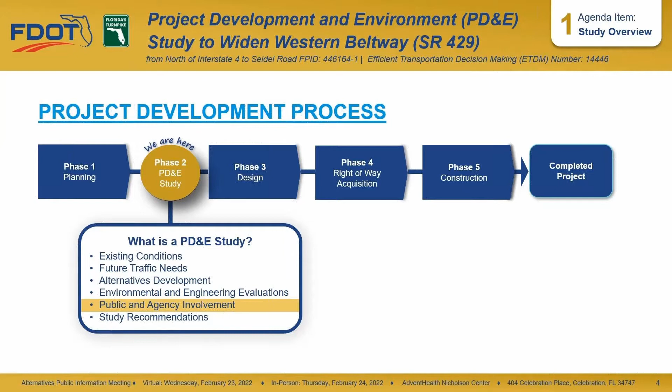An important component of the PD&E process is public and agency involvement. All findings and recommendations are documented at the end of the study. If a build alternative is selected, then the process moves forward into the design phase. If additional land is required for the project, right-of-way is acquired after the design phase, followed by the project's construction phase.

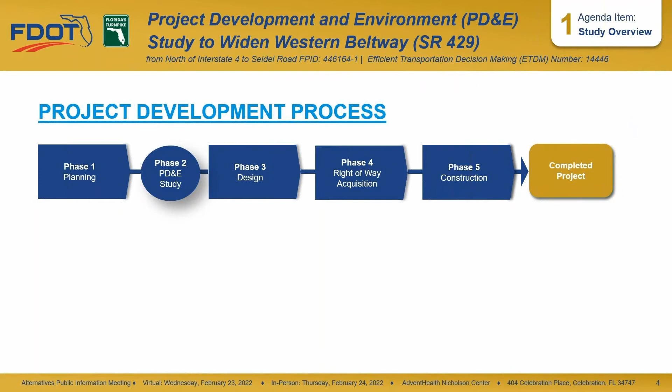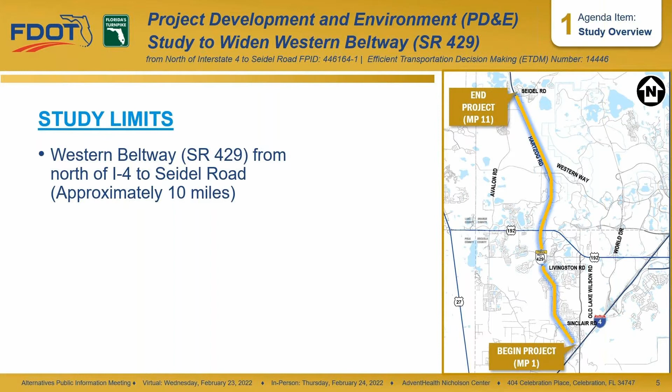The study limits extend from north of Interstate 4, milepost 1, to Seidel Road, milepost 11. The project is located within Osceola and Orange counties. The study scope includes evaluation of alternatives for the widening of Western Beltway from 4 lanes to 8 lanes, and evaluation of improvements to existing interchanges at Sinclair Road, US 192, Western Way, and Seidel Road. The study scope also includes evaluation of a potential new interchange, proposed at Livingston Road.

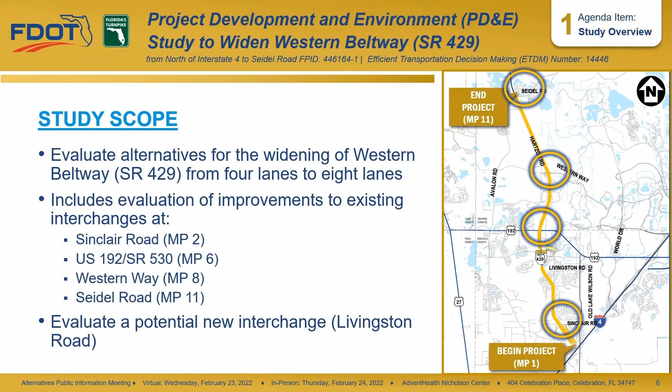Project needs arise from issues and concerns that may frequently slow down traffic, cause delays, or lead to accidents. The need to widen the Western Beltway is based on enhancing safety, accommodating travel demand through the year 2050, improving travel times and reliability, and enhancing economic viability, emergency responsiveness, and evacuation times.

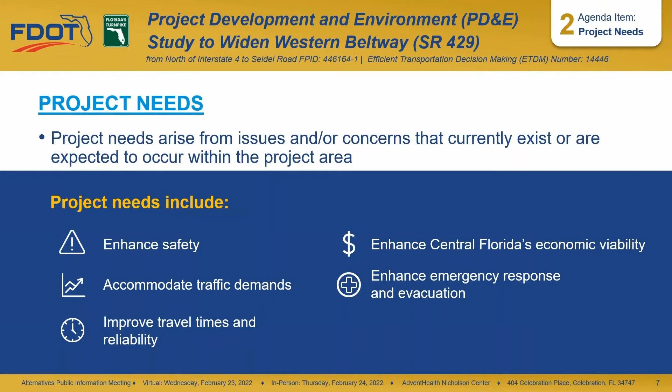Improvements to Western Beltway are needed to enhance safety. Between 2014 and 2018, there were 161 crashes within the study limits between the I-4 ramps and Seidel Road interchanges. The estimated economic crash cost is about $33 million over the 5 years. Congestion is a major contributing factor to crashes. If nothing is done, congestion will continue to rise, leading to an increase in crashes.

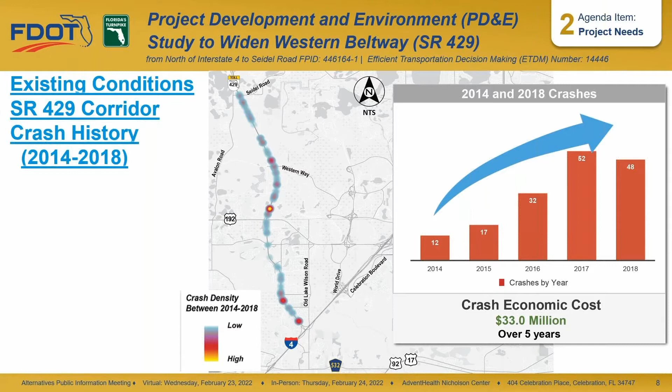The average historical growth rate on State Road 429 between opening and closing years is 10%. This can be attributed to the high increase in population and employment opportunities in the area, as well as recreational activities. During the evening commute, traffic backs up on State Road 429 in the southbound direction towards I-4, and long queues have been observed at the State Road 429 southbound off-ramp to US 192.

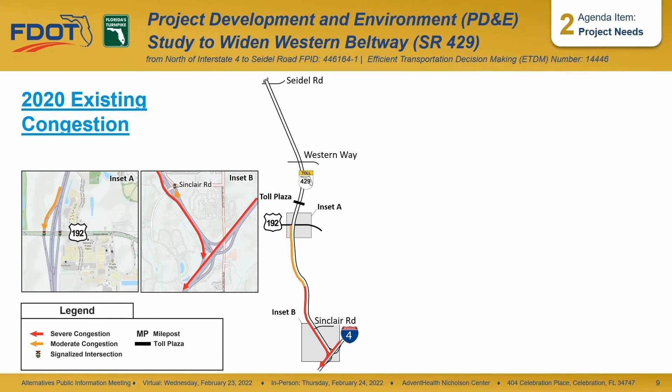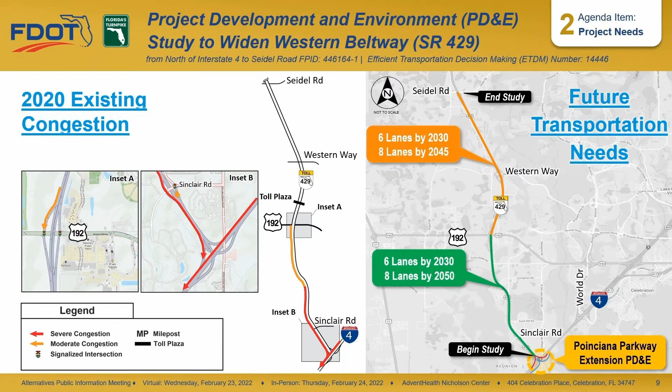In order to accommodate future travel demand, 6 lanes are needed by 2030 and 8 lanes will be needed by 2045 for the segment between US 192 and Seidel Road, and between I-4 and US 192 by 2050.

The improvements considered as part of this study include both improvements to the main line and to the interchanges within the project limits, and also a planned connection to the Poinciana Parkway extension planned to the south as part of a separate study.

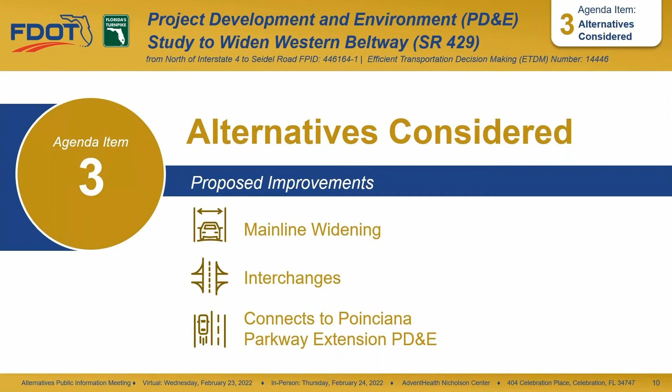In addition to widening the main line, proposed interchange improvements from south to north within the project limits include operational improvements at Sinclair Road, a new interchange at Livingston Road, operational improvements at US 192 and Western Way, and 2 options for interchange improvements at Seidel Road.

The no-build alternative will remain viable throughout the study. We will cover all of these proposed improvements in additional detail.

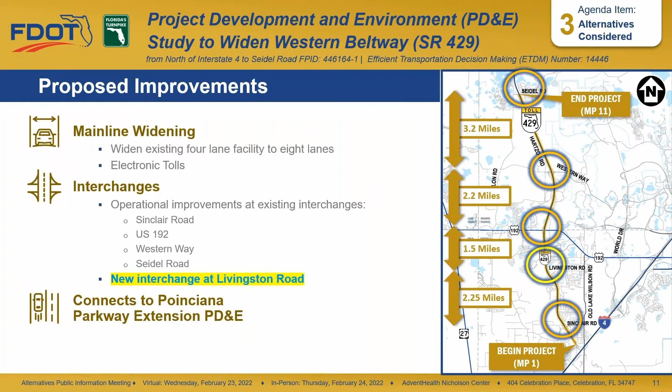Western Beltway will be widened from 4 lanes to 8 lanes throughout the project limits. This graphic shows the existing 4-lane typical section with a 64-foot median. The proposed mainline improvement widens the roadway to both sides. The proposed ultimate 8-lane typical section after widening to both sides includes 4 travel lanes in each direction.

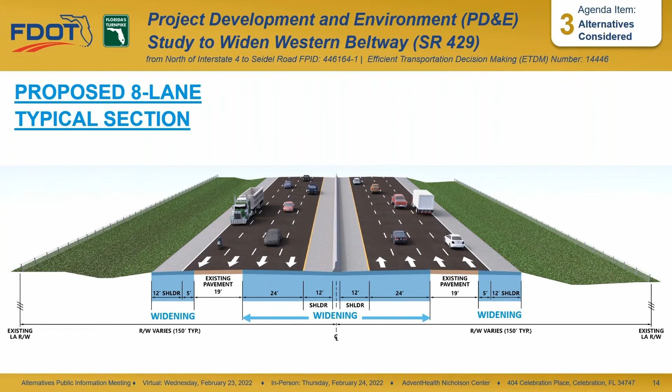Now, we will cover the interchange improvements from south to north, starting with the existing Sinclair Road interchange 1 mile north of I-4.

This presentation shows aerial views of the conceptual design of the proposed improvements with north oriented to the right as shown. The legend shows the difference between any existing and proposed signals shown on the aerial view.

This graphic shows where the project begins and the first interchange at Sinclair Road. The Poinciana Parkway Extension PD&E Study includes improvements to the I-4 interchange and the Sinclair Road interchange.

If Poinciana is constructed, Western Beltway widening would interface with that project north of Sand Hill Road. However, if the Poinciana Parkway Extension project is not constructed, the Western Beltway widening would start further south at the I-4 ramps. The existing Sinclair Road Diamond interchange and the existing signal at the northbound off-ramp would remain.

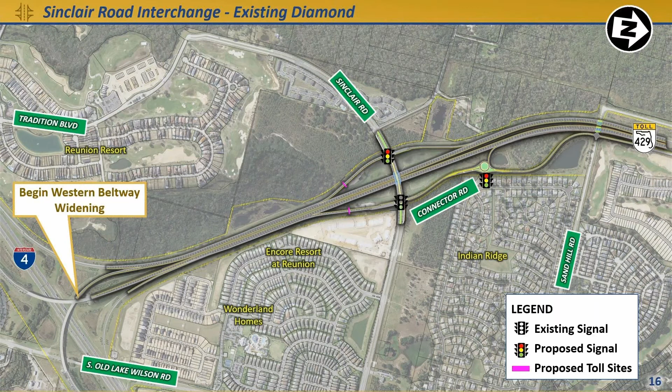Traffic signals would be added for the southbound off-ramp and the southbound on-ramp, as well as turn lanes at all the ramps. These improvements would allow the interchange to operate at a higher level of service in the future as traffic increases. There are 2 options for the Connector Road intersection with a northbound on-ramp.

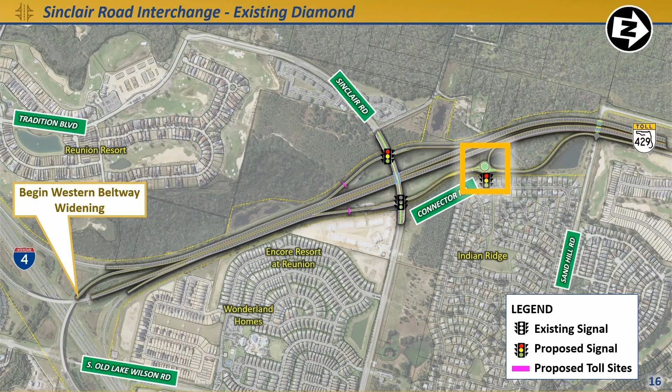We will take a closer look at these options. The first option is the signalization option, which adds a signal at the ramp terminal's intersection with Connector Road, as well as a turn lane in each direction.

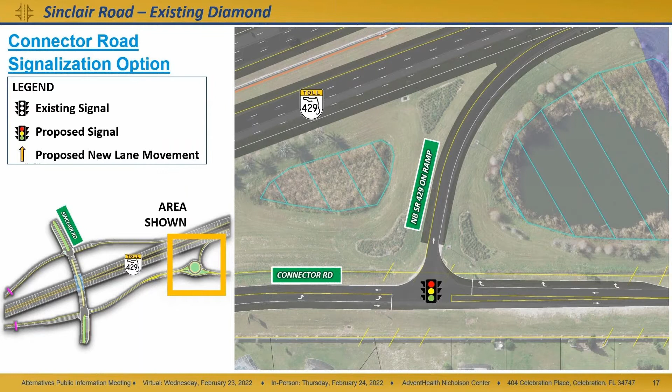The second option would be the addition of a roundabout at the same intersection instead of a traffic signal to control all turning and through movements. The roundabout option shown offers the same movements as the signalization option.

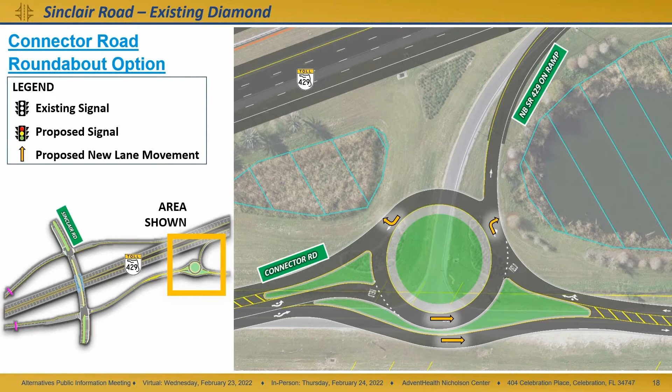Moving to the intersection of the ramp terminals and Connector Road at Sinclair Road, the existing signal would remain, but turn lanes would be added at 3 of the 4 intersection approaches.

Moving west of State Road 429, a new signal would be added at the ramp terminal intersection with Sinclair Road, as well as a right turn lane on Sinclair Road and a left turn lane at the southbound ramp terminal.

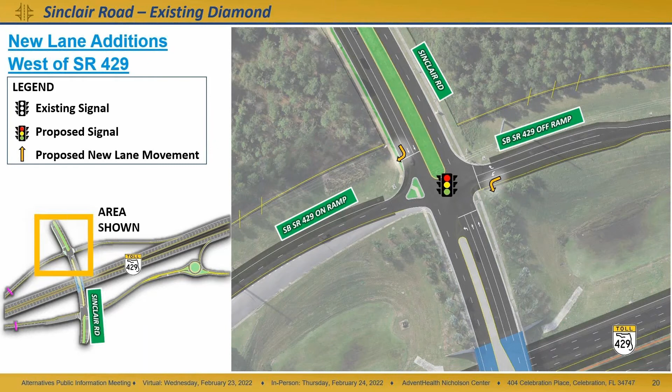The table shown is an evaluation matrix that compares the Sinclair Road interchange alternatives. Both Sinclair Road options have traffic and safety benefits that offer significant improvement over the no-build option. The roundabout option offers the most benefits at a higher cost as compared to the signalization option.

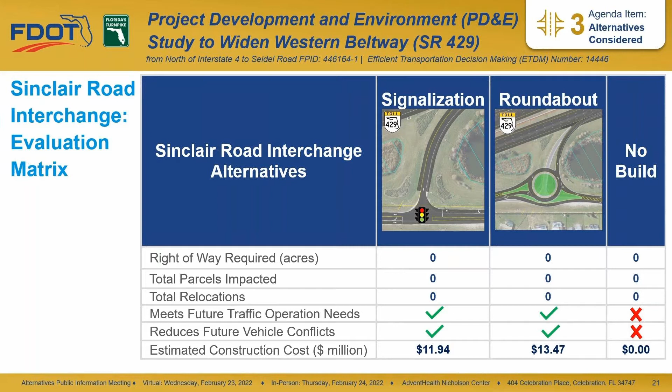The next interchange would be a new interchange located 2¼ miles north at an extension of Livingston Road. This new interchange will relieve US 192 and provide additional mobility in the study area.

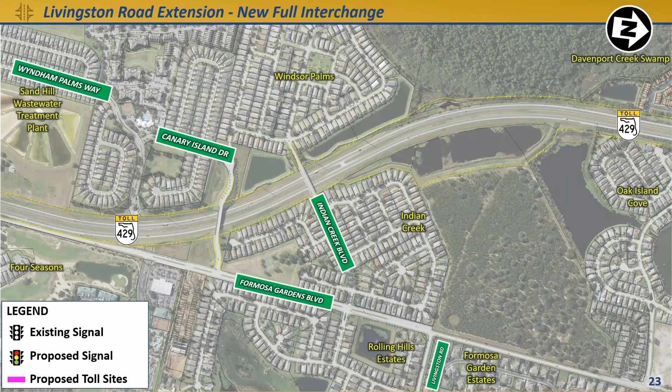The new Livingston Road interchange would offer full access between State Road 429 from an extension of Livingston Road as shown. The new interchange would provide for all movements with loops to the south side as shown here. The ramps to and from the south would be tolled with the exact location to be determined.

This improvement would include widening Formosa Gardens Boulevard for about 1/2 mile to eliminate the short section of 2-lane roadway and match the existing 4-lane condition south and north of Livingston Road. The blue highlighted areas show the location of potential right-of-way impacts where additional land would be required to accommodate the improvements.

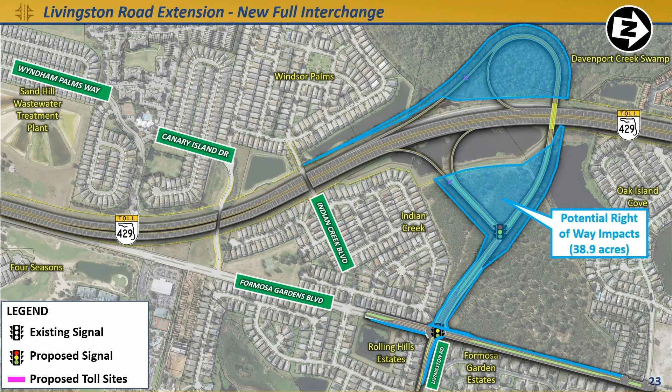We will take a closer look at the beginning of the proposed Livingston Road extension first. The extension of Livingston Road past Formosa Gardens Boulevard includes improvements to the intersection. These improvements include a new signal as well as additional turn and through lanes at every intersection approach.

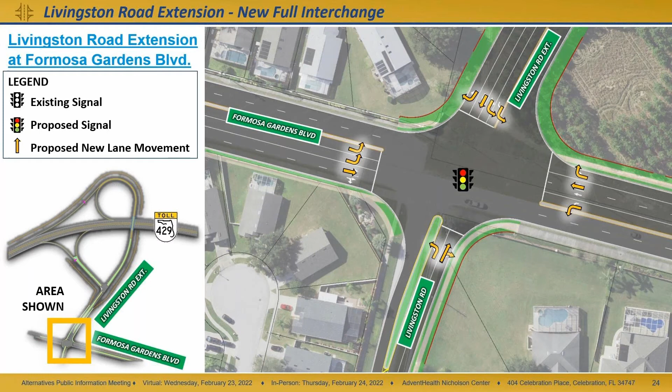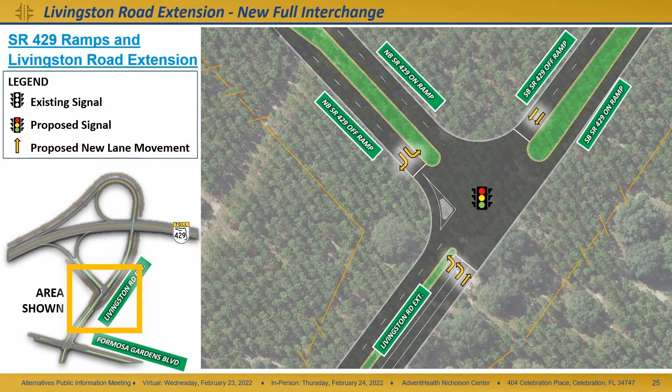The new T intersection at the extension of Livingston Road and the State Road 429 ramp terminals would be signalized and include new movements at all approaches to grant access to State Road 429 northbound and southbound. Modifications to the existing interchange at US 192 are also under consideration.

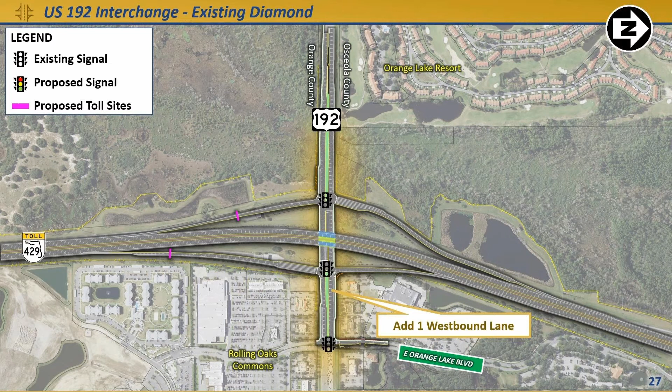Modifications to the existing US 192 interchange include minor interchange improvements at the off-ramps, the addition of one eastbound lane on US 192 from west of the southbound ramp, and one westbound lane from East Orange Lake Boulevard to west of the southbound ramp terminal intersection. These improvements are generally within the existing right-of-way, but may require small amounts of right-of-way to be acquired. We will take a closer look at the intersection improvements associated with the interchange, starting at East Orange Lake Boulevard.

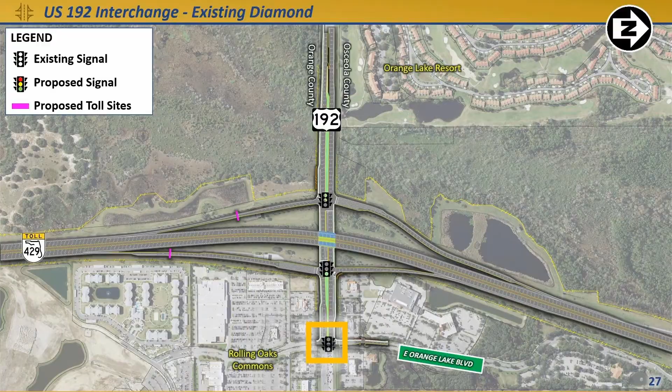On East Orange Lake Boulevard, a new left turn lane would be added at US 192 at the existing signalized intersection, and a new through lane begins on US 192.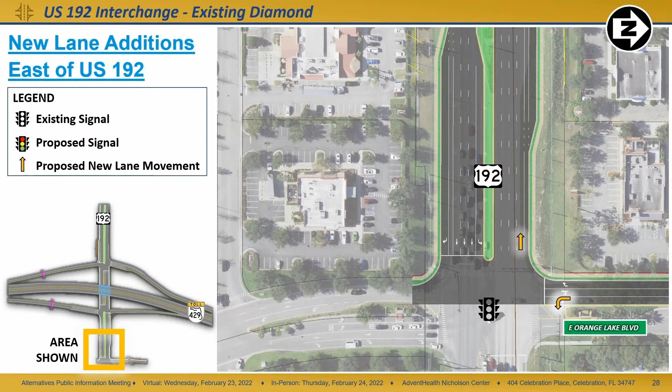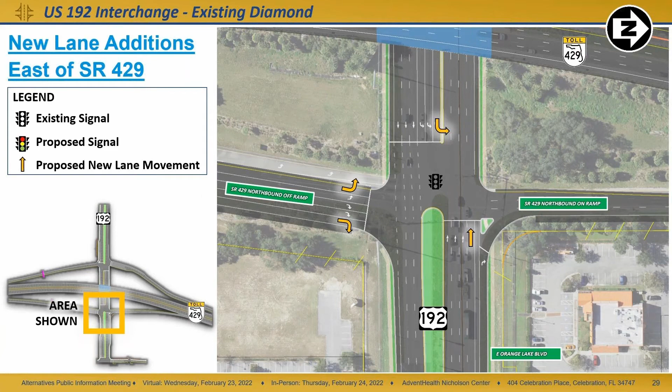Moving along US 192, closer to State Road 429, an additional through lane would be added onto US 192 westbound. In addition, turn lanes would be added on US 192 and at the State Road 429 ramp terminal. West of State Road 429, an additional through lane would be added in each direction on US 192, along with additional turn lanes at the State Road 429 ramp terminal.

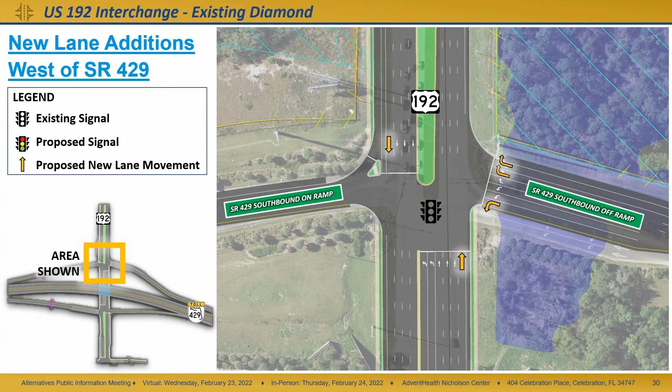Located 2.2 miles north, Western Way is the next interchange with modifications proposed. The proposed Western Way interchange is shown here. The main improvement at Western Way is the addition of a second lane to the southbound loop ramp as shown. Other improvements include signals at the ramp terminals and additional turn lanes at both intersections. The improvements shown are generally within existing right-of-way, but may require a small amount of right-of-way to be acquired. We will take a closer look at the intersection improvements on Western Way starting at the ramp terminals east of State Road 429.

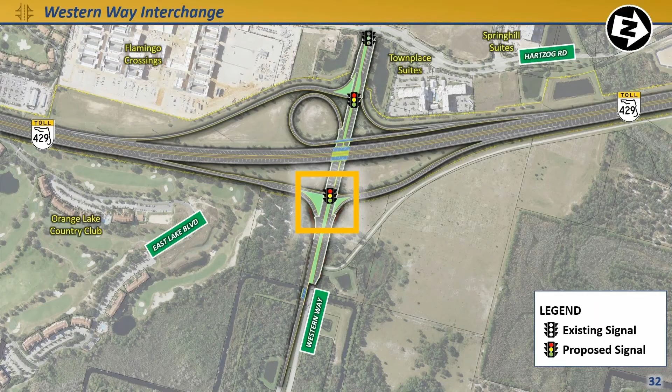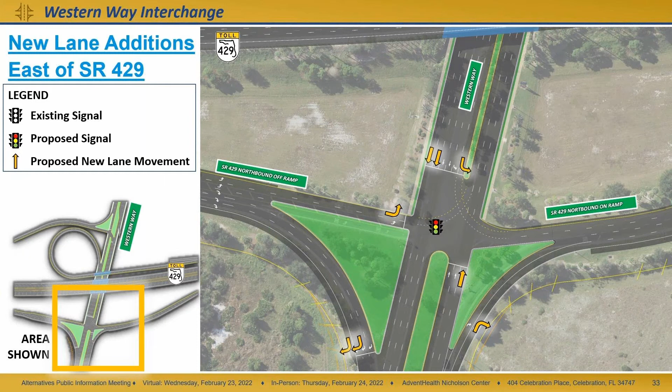Intersection improvements include a new signal as well as additional through lanes in each direction on Western Way. Additional turn lanes would be added at each intersection approach as shown. Moving west of State Road 429, a signal would be added at the ramp terminal as well as an additional left turn lane accessing the State Road 429 southbound on-ramp.

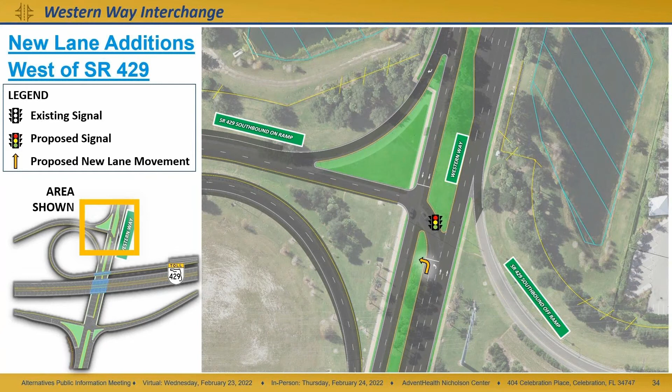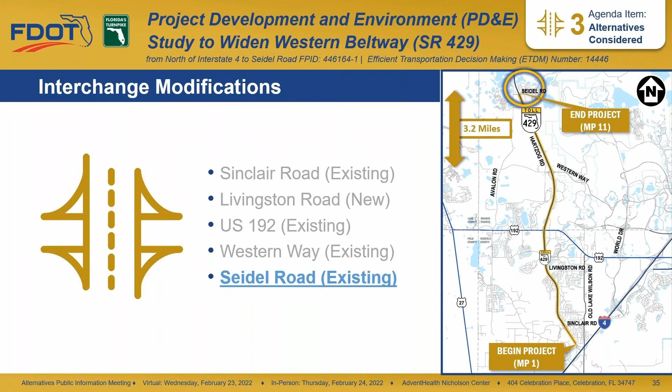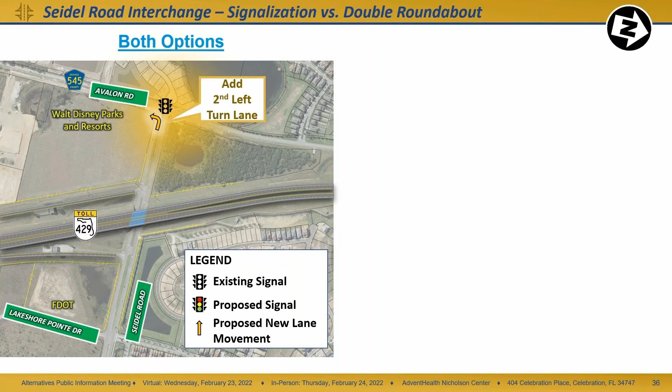The Seidel Road interchange, located 3.2 miles north of Western Way, is an existing interchange with proposed modifications. Two options for Seidel Road are under consideration. Both Seidel Road options would include widening the existing State Road 429 bridges over Seidel Road and a second left turn lane added approaching Avalon Road. The first option at Seidel Road is the signalization option, which includes the addition of signals at both ramps to control traffic movements. No additional right-of-way is required for the signalization option.

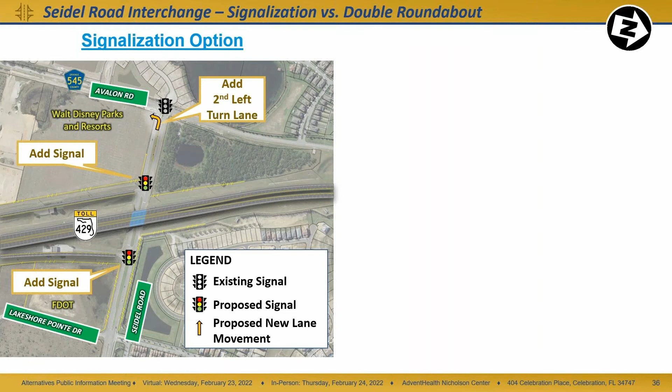The second alternative is the double roundabout option shown on the right, which adds a double roundabout through the interchange area instead of the two traffic signals proposed by the signalization option. For both alternatives, State Road 429 would transition to the existing configuration north of Seidel Road. The double roundabout option requires a total of 0.6 acres of additional right-of-way from 5 parcels.

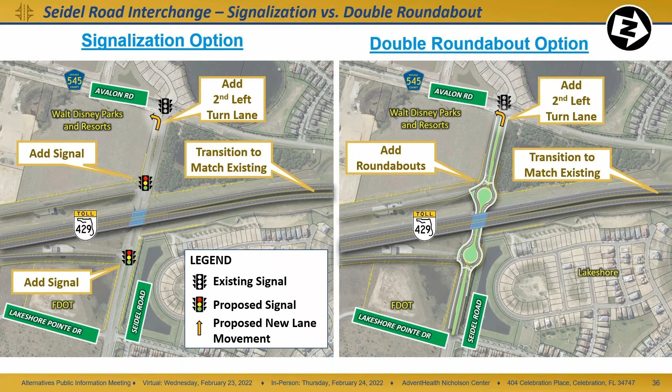The table shown is an evaluation matrix that compares the Seidel Road interchange alternatives. Both Seidel Road options have traffic and safety benefits that offer significant improvements over the no-build option. The signalization option offers these benefits at a slightly lower cost and with less impacts as compared to the double roundabout option.

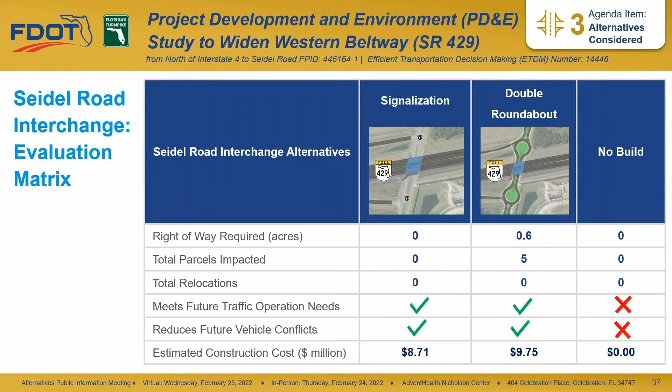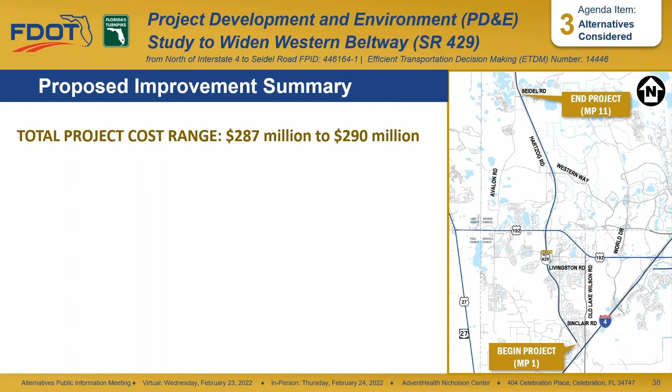The cost of the proposed improvements ranges from $287 million if the signalization options are selected at Sinclair Road and Seidel Road to $290 million if the roundabout options are selected at those locations. These costs include widening the State Road 429 main line within the project limits, the operational improvements described in this presentation at the interchanges shown, and the new interchange at the proposed Livingston Road extension.

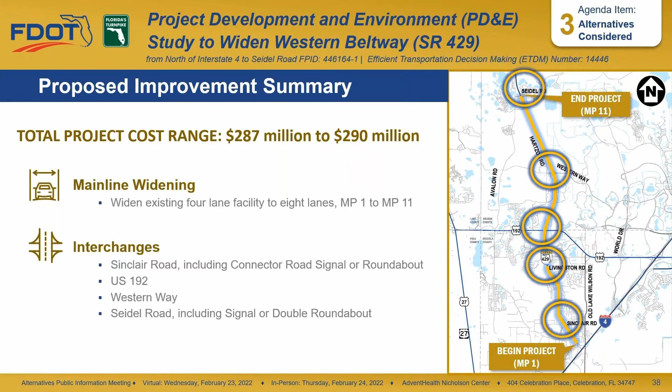As part of the study, Florida's Turnpike Enterprise is evaluating the potential social, natural, physical, and cultural effects of the project and of each alternative. Features listed are just some of the types of analysis included in this PD&E study. Avoidance or minimization of impacts to these features is a key consideration. Impacts that cannot be avoided will be mitigated.

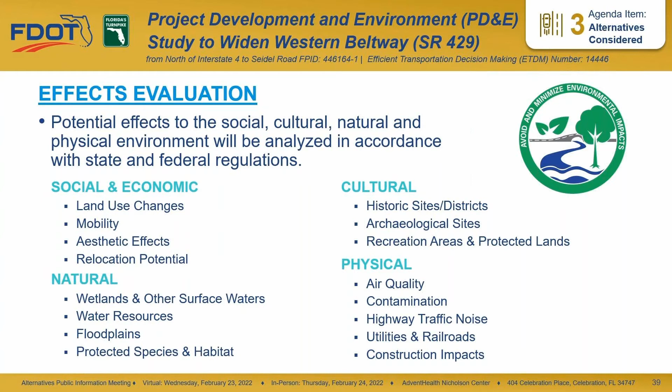Public involvement is a very important part of the PD&E study process. Various outreach methods will take place throughout the life of the PD&E study. 2 public meetings will be held for this study. Today's meeting, the Alternatives Public Information Meeting, is the first meeting for this study. The second meeting will be the public hearing.

In addition to the scheduled public meetings, other outreach methods include the distribution of newsletters, information posted to the project website, www.sr429i-4toseidel.com, and other meetings with stakeholders and small groups.

Throughout this study, Florida's Turnpike Enterprise will coordinate with the Central Florida Expressway Authority, the Reedy Creek Improvement District, Metro Plan Orlando, and Osceola and Orange counties.

After tonight's meeting, we will review public comments in conjunction with the social, cultural, environmental, and engineering factors to reach a recommendation on a preferred alternative. The preferred alternative will then be presented to you at the public hearing, tentatively scheduled for the end of this year. This study is expected to be completed by early 2023.

Please note that this schedule is subject to change and that subsequent project phases, including design, right-of-way, and construction, are not currently funded.

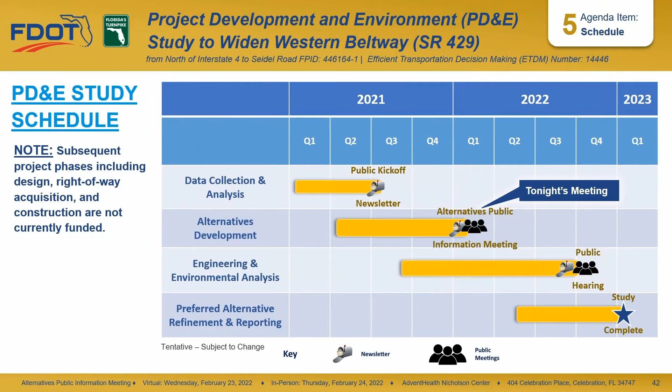Your comments are essential to this process and will help Florida's Turnpike Enterprise understand your concerns and suggestions for improvements. We encourage you to provide a written comment tonight, or if you prefer, you may mail your comments or submit by email. All contact information is also included in the project handout. You can also submit your comments directly through the project website.

The website address is www.sr429i-4toSeidel.com. We would appreciate your written comments by March 10th, 2022.

For more information, attendees of the virtual meeting can submit a question via the GoToWebinar question box, or using one of the previously mentioned communication methods after the meeting. All attendees may also review the project information posted on the project website, which includes all the information presented at tonight's meeting. In-person attendees may ask questions to Turnpike representatives and review the aerial maps and other exhibits on display.

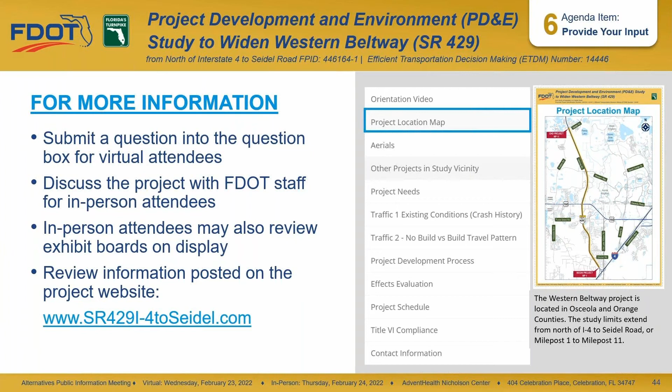After this meeting, if you would like to speak with someone, please contact one of the Turnpike representatives as noted in your handout. Thank you for your interest in the PD&E study to widen Western Beltway from north of Interstate 4 to Seidel Road, and thank you for taking time to participate in this meeting.

Okay, so we hope you found the project video informative. At this time, we would like to move into the question and answer portion of our meeting. During registration for this meeting, we asked you if you had any questions for us to answer at this meeting. So we've compiled your questions and put together a few slides to help us answer the questions that we've received so far.

If you think of another question, locate the question box located in the control panel, type your question in the box, and then hit the send button. We will respond to those questions at a later date. All of the questions submitted tonight will become part of the public meeting record and be part of the study process. So with that, let's get to your questions.

Matt, what is our first question? So Stephanie, this is a densely populated corridor in many locations along the project limits, and we have a lot of people that own homes in this corridor, some right along that existing roadway. This is the question we have received the most from tonight's registrants. We've heard it from residents of Emerald Island, Reunion, Happy Trails, and others: how will this project impact my neighborhood, my house, or my property?

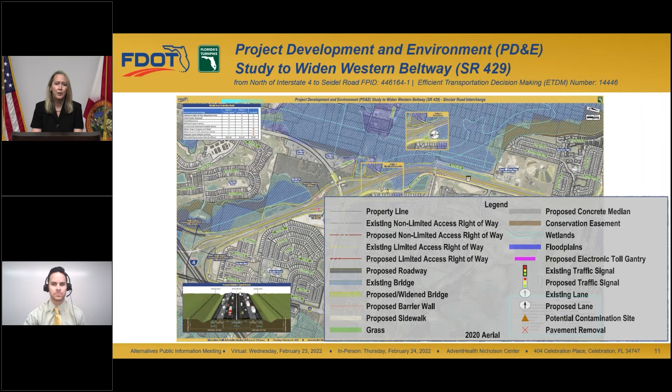The aerial exhibit boards, like the one shown here, are the best place to look to see your property in relation to the proposed improvements. These exhibits include a scale and a north arrow in the upper right-hand corner. They also include a legend in the bottom right-hand corner that shows what each symbol on the map means. In the upper left-hand corner, you will find an evaluation matrix that compares the benefits, cost, and impacts associated with the proposed improvements.

Okay, thanks, Stephanie. So when many of tonight's registrants heard widening, their first thought was probably, is the turnpike going to have to buy land to accommodate these improvements? Can you elaborate on that? Is additional right-of-way going to be required for these improvements?

Sure, I can do that. So for the main line widening of State Road 429, the additional lanes fit within Turnpike's existing right-of-way, with the exception of one small sliver of land needed along Formosa Gardens Boulevard, just north of Sand Hill Road. Very small pieces of right-of-way will have to be purchased at the interchanges of US 192, Western Way, and Seidel Road. As I'm sure you noticed in the video, the new interchange at an extension of Sinclair Road requires the most right-of-way, at just under 39 acres. Also, we may need to purchase right-of-way for stormwater ponds, but that would be determined later.

What if I looked at the aerial concepts on the website and I see that right-of-way will be needed for my property for these improvements? What happens next? The best place to get a detailed overview of the right-of-way acquisition process is on the project website. Scroll down to the Documents section and click on Videos. You'll find a comprehensive video explaining the right-of-way acquisition process there.

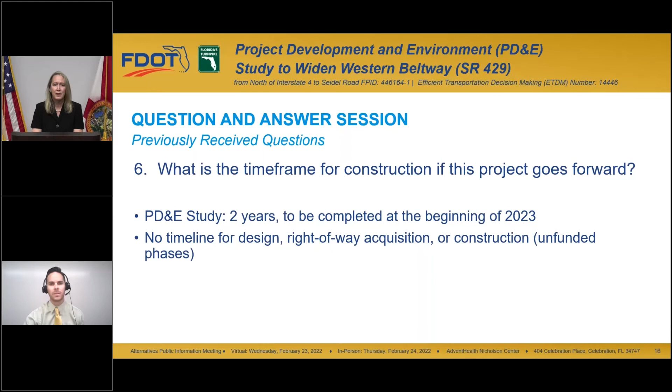Assuming this project goes forward, what is the timeline for construction? This PD&E study will take approximately 2 years to complete. It began in January 2021, last year, and we anticipate it being completed at the beginning of 2023. Since none of the other project phases, such as design, right-of-way, or construction, are funded, there is no timeline for completing construction of this project, even if a build alternative is selected.

We had one registrant who wanted to ask about the need for these additional lanes on this project. Do we even need 4 lanes in each direction on State Road 429? Could we just get away with 3 lanes in each direction, or even just keep the 2 like we have right now?

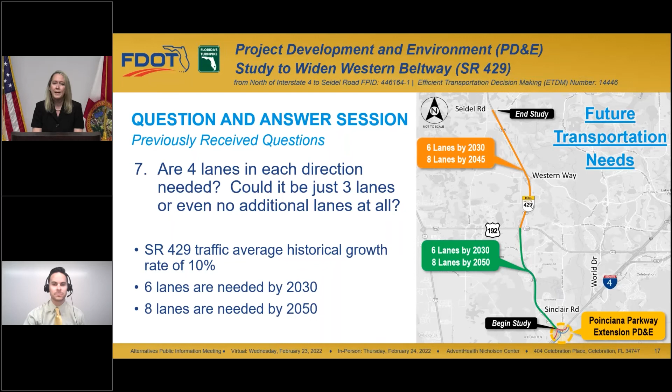To answer that question, yes, the roadway widening is needed. State Road 429 has had an average historical growth rate of 10% between opening and current years. In order to accommodate future travel demand, 6 lanes are needed by 2030, and 8 lanes will be needed by 2045 for the segment between US 192 and Seidel Road, and between I-4 and US 192 by 2050. Keep in mind that we may need to phase the projects by widening to 6 lanes first, and then wait to widen to 8 lanes when they are warranted.

On the opposite side of that same question about whether the widening of State Road 429 is needed, we had another question asking, why is the widening stopping at Seidel Road? Why isn't it being extended north of Seidel? For this question, the portion of State Road 429 north of Seidel Road is under the jurisdiction of the Central Florida Expressway Authority, or CFX. The CFX 2040 master plan currently does show the need to widen State Road 429 north of Seidel Road by 2040. You can find out more about that on the CFX website, www.cfxway.com.

Some of our registrants have asked questions about other projects in this area. Can you give us a brief update about what other projects are being developed in this area? Yes, the video had an extensive list of other projects, but I'll highlight a few.

First, the Poinciana Parkway Extension PD&E Study is an adjacent project many of you are likely aware of. We covered that one at last night's public meeting, and it will be on display at the in-person public meeting tomorrow night. It would establish a connection from County Road 532 and the I-4 State Road 429 interchange. We've also got the I-4 BTU, or Beyond the Ultimate project, to put express lanes in the median of I-4, and another project to add auxiliary lanes to I-4 between County Road 532 and State Road 429, which includes some resurfacing work on State Road 429. There is a lot of work ongoing and planned in this area.

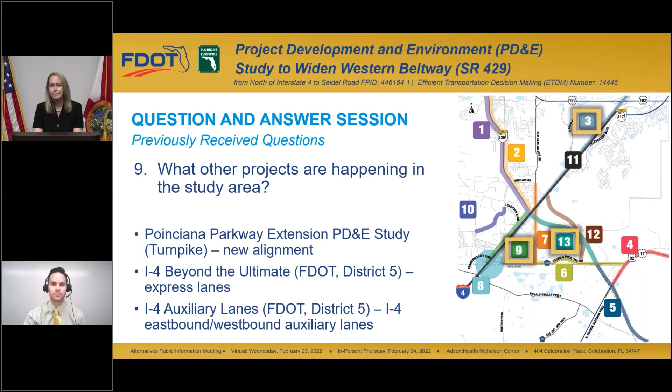Thanks, Stephanie. So speaking of additional lanes, I mentioned earlier that many of this corridor's residents live adjacent to State Road 429 now, and they are concerned about the additional noise that these new lanes could bring to their neighborhood. We've heard this question multiple times from various neighborhoods.

A comprehensive noise analysis will be completed as part of the PD&E study, and the results will be presented at the public hearing, currently anticipated early next year. Residences within the project limits will be studied for future noise abatement. Any noise walls identified as potentially feasible and cost reasonable for noise abatement under federal and state regulations will be evaluated again during the design phase. If they then meet FDOT criteria, noise barriers would be built during the roadway's construction phase. A video that explains the noise evaluation process and procedures can be found on the project website under the videos tab of the documents section.

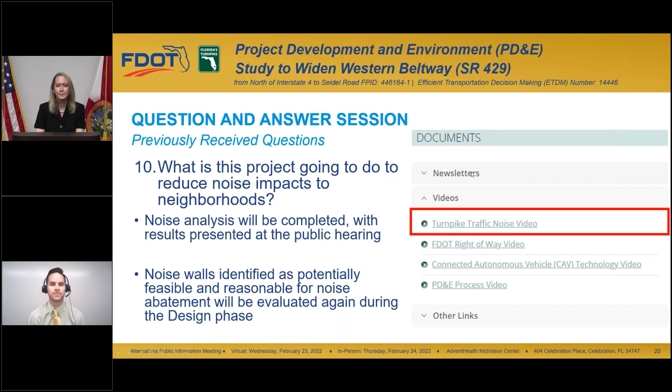Okay, so that sounds like you're talking about future noise. Thanks, Stephanie. So for many of our State Road 429 corridor residents, we've heard versions of this scenario: I live near State Road 429 and the traffic noise is already loud now, and additional lanes are only going to make the noise worse. Can my neighborhood get a noise wall now, or do we have to wait for this project to be built?

So yes, with the traffic growth in the area, lots of residents are feeling that way. Unfortunately, we don't provide noise walls to address existing conditions. As a result, FDOT has no retrofit program to provide noise walls on existing facilities. However, the noise analysis for this project would be considering future noise levels associated with projected traffic after the roadway is widened.

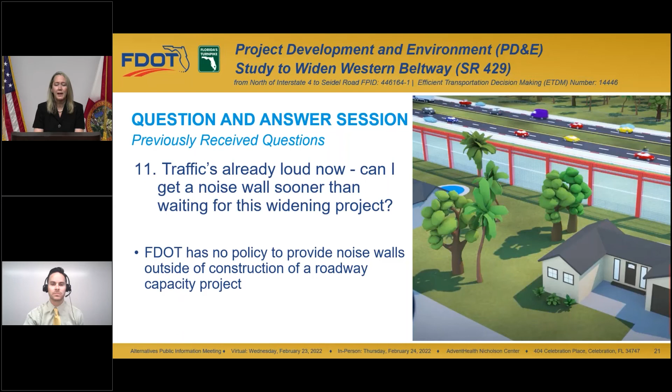Okay, so let's talk about Seidel Road. We had a question about that one. Currently, it has ramps to and from the south, but nothing to the north. Will the proposed improvements include adding a northbound entrance ramp and southbound exit ramp at Seidel Road?

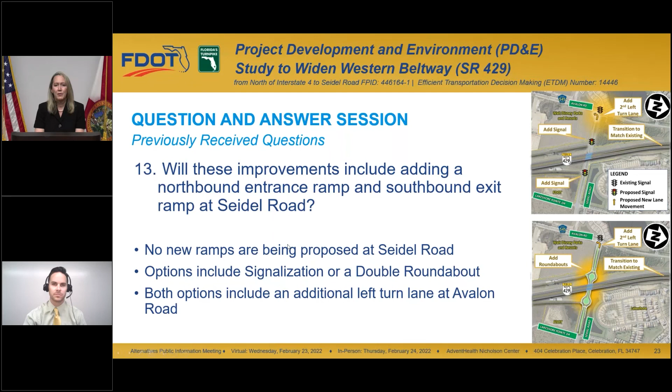No. Proposed improvements do not include adding any ramps at Seidel Road. The options at Seidel Road include adding a signal or a double roundabout at the existing ramps and a left turn lane at Avalon Road. The portion of State Road 429 north of Seidel Road is under the jurisdiction of the Central Florida Expressway Authority, or CFX, as I mentioned. The CFX 2040 Master Plan currently does not include projects to widen State Road 429 or add ramps to and from the north at Seidel Road. That plan could change with future updates.

All right, you mentioned this Turnpike PD&E study will be completed at the beginning of 2023. So then what? What happens next? Assuming the build alternative is selected over the no build alternative, when the study is completed, the project would move into the design phase, then the right-of-way acquisition phase, and then finally the construction phase. But remember, none of those phases are funded at this time in the Florida's Turnpike Enterprise 5-year work program.

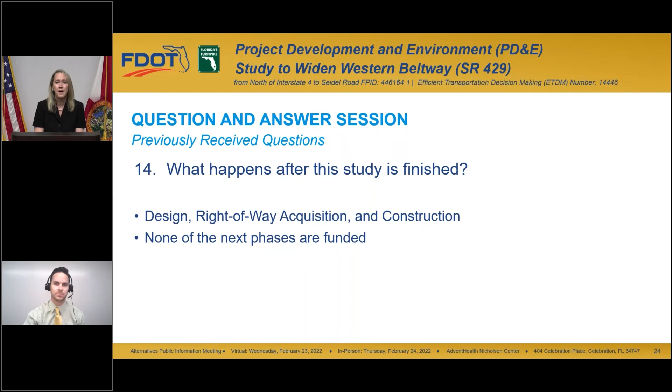Okay, well, thank you, Stephanie. That's the last of our questions compiled from registration. We are still collecting questions and comments through the question box tonight.